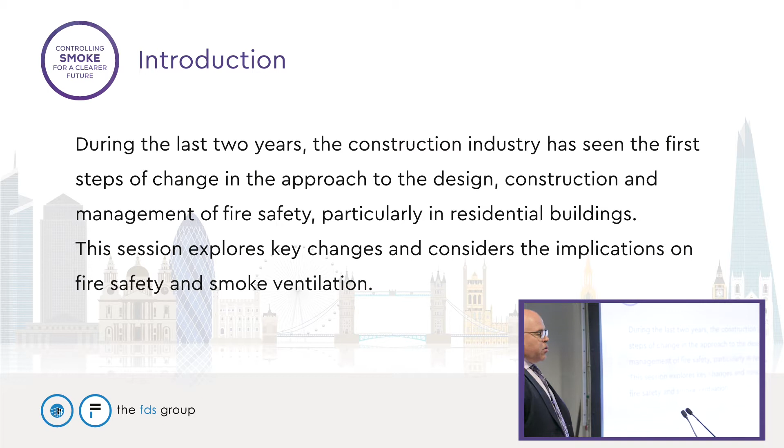The whole of the construction industry, as a result of it, has seen the first steps of change in a new approach to the design and the construction and the management of fire safety, particularly in residential buildings. What I wanted to do with this session is to explore the key changes and consider the implications on fire safety, but also some of the implications on smoke ventilation.

So what have the key changes and drivers been? I think everyone will have heard of the Hackitt report. That was an independent review of the building regulations and fire safety that was commissioned by the government following the Grenfell Tower fire. The report, carried out by Dame Judith Hackitt, was published in May last year.

In response to the fire and the Hackitt report, the government set up the Building a Safer Future programme, and there have been some recent new building regulations as a result of that, and I'm sure there'll be some future new building regulations, some of which have been consulted on as we're here today.

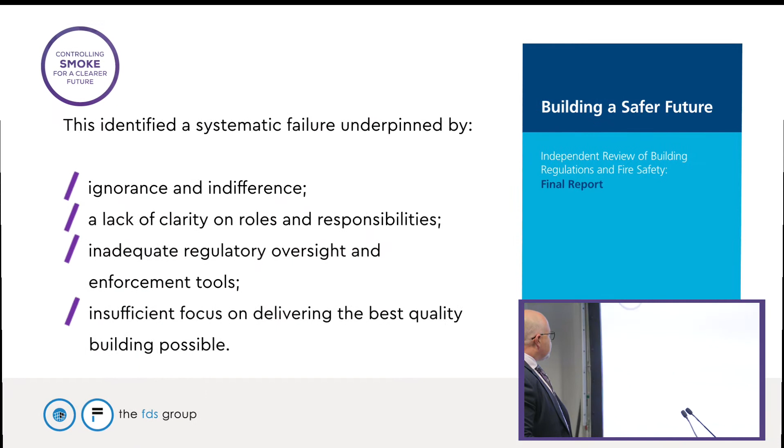So the Hackitt report, summed up in a few sentences in terms of Dame Judith's findings. Ignorance and indifference. So I think that's about the interpretation and the application of the building regulations and the guidance, the knowledge and competency of the guidance to the building regulations, and perhaps taking it as seriously as it should be.

She found that there was a lack of clarity on roles and responsibilities, and that was through from the client through to the developers and contractors, the designers, and the people managing the occupied buildings.

Inadequate regulatory oversight and enforcement tools. So that's really talking about the building control bodies and perhaps the fire service and their role in delivering safe buildings, and perhaps there not being enough teeth in the building regulations and the Building Act to be able to make sure that they are properly applied and delivered.

And then insufficient focus on delivering the best quality building possible, and that's a difficult one. There's a lot of focus, I think, on the speed of delivery and profit in the construction of new buildings. Inevitably so, the new buildings are built as a business. So those are the key findings that she identified.

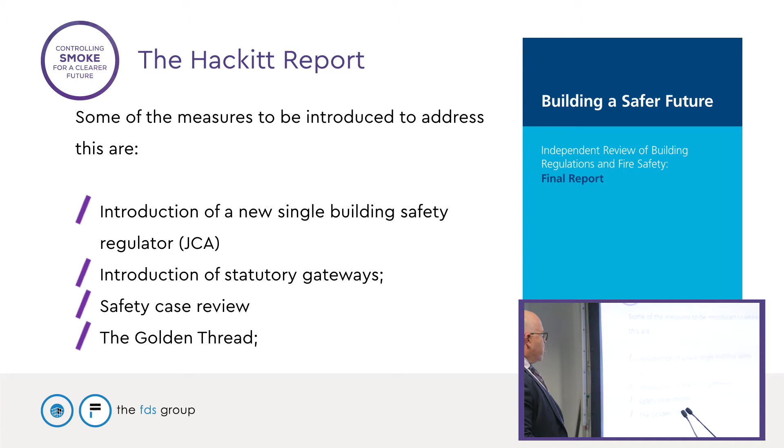So the MHCLG have been responsible for responding to the Hackitt review. The government's proposing a new building and fire safety system which puts residents' safety at its heart. New building regulations have been introduced prohibiting the use of nearly all combustible materials in the external walls of residential buildings taller than 18 metres. And there's a good chance that that's going to be extended to include other high-risk buildings in the future.

Approved Document B has recently been republished. The objective of that was to provide clearer advice on how to meet the fire safety requirements of the building regulations. And there's currently a consultation on reducing the threshold for the provision of sprinklers in flats.

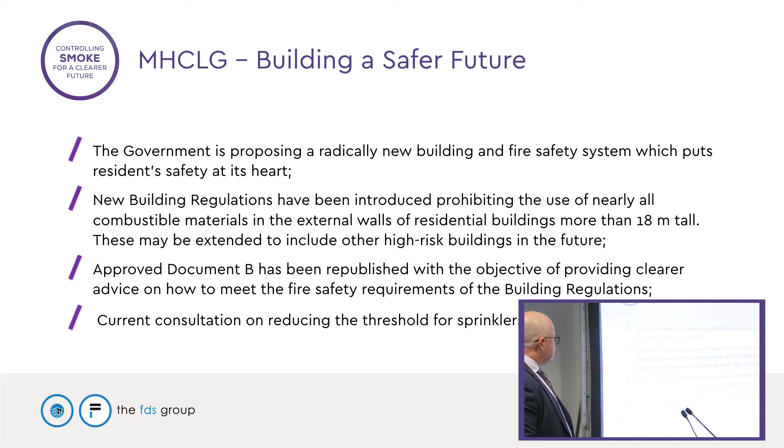There was a consultation earlier in the year. We're currently awaiting feedback. The MHCLG are in the process of analysing that feedback, but the proposals were in 5 areas. So the scope of the new regime: it would apply to new residential buildings and existing residential buildings when they're altered. It wants to set out that the duty holders have very clear responsibilities through a building's design, construction, and occupation. So that's responsibilities for the client, the developer, the designers, the contractor, and the people that manage the building during occupation.

They want to give residents a stronger voice in the system, making sure that they're not ignored. They want to create a transparent process for receiving complaints and dealing with them, so that the residents can see what's happening about the fire safety standards in their building. We've already mentioned the need for a new regulator of building safety, and the need for strengthened enforcement and sanctions, so that the regulations and the application of them have actually got teeth and mean something.

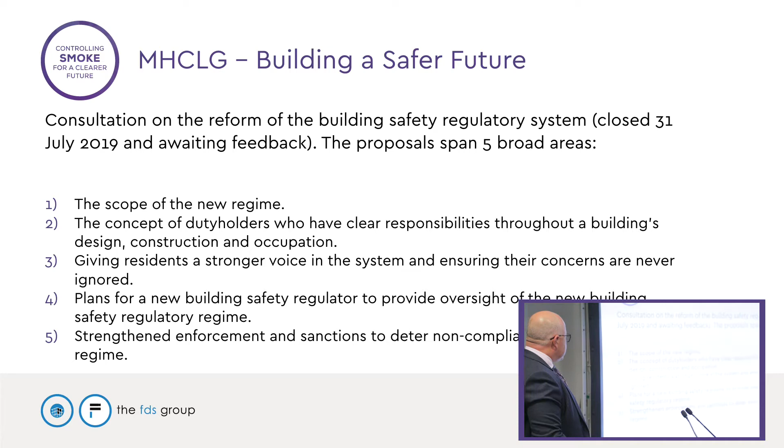So I mentioned earlier there's a consultation currently on reducing the threshold for sprinklers in flats. That closes on the 28th of November, and it's certainly something that I'll be responding to. The proposals cover 3 areas. The main area is to reduce the height at which sprinklers are installed in buildings that are used as flats. There are a couple of secondary areas that it's looking at in terms of improving wayfinding and evacuation alert systems. So the sprinkler threshold, the plan is to reduce it to 18 metres in flats.

This proposal is a result of the MHCLG's call for evidence last year, when a large majority of the comments were in favour of reducing that threshold. In fact, I've heard recent comments saying that some people would like to see it reduced even further to 11 metres, which I think would be in line with Wales and Scotland. Clearly, the installation of sprinkler systems in so many more buildings is going to have an effect on the sprinkler industry, and there's a 6-month transition proposed to give the industry a chance to get up to speed with that.

It's only going to apply to new buildings. So the vast majority of the housing stock, blocks of flats that are over 18 metres, are existing, and it's not intended that it will apply to those. That's going to be dealt with, I think, by the safety case review that's going to come in place, and that will look at whether sprinklers need to be retrospectively installed in those buildings.

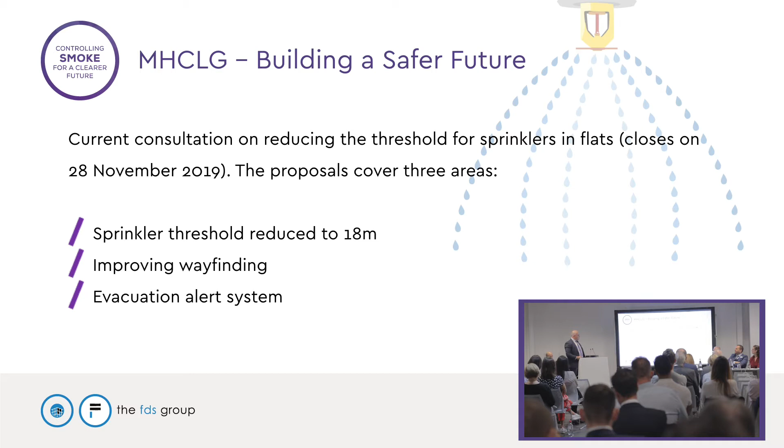The third proposal that they've made, and I believe this has already been adopted in Scotland, is to incorporate an evacuation alert system. Now, this is to give the fire brigade a chance to evacuate the whole building in the event that a fire situation demands that it's necessary. There's a few concerns about this.

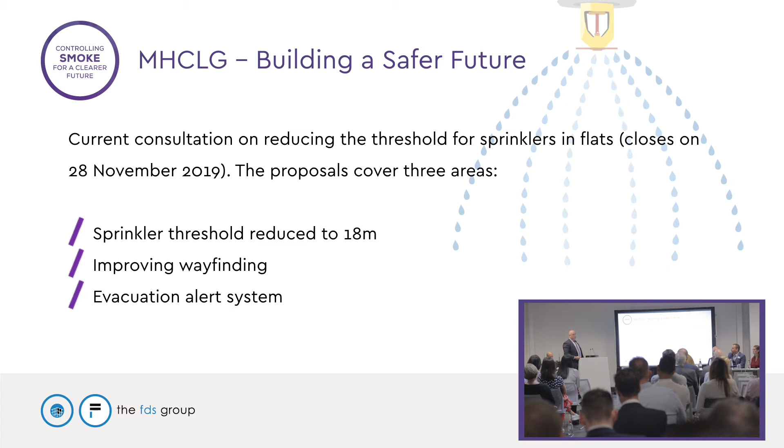Firstly, the evacuation strategy currently for blocks of flats is defend in place, and for that reason the stairs aren't designed to be wide enough for everyone to evacuate simultaneously, so there may be some queuing on the stairs if that happens. Secondly, smoke ventilation systems are generally designed for one door to be opened at a time, and we could find ourselves in a situation where multiple doors are opened, reducing the effectiveness of the ventilation system. So these are all things that would have to be looked at if this is to be introduced.

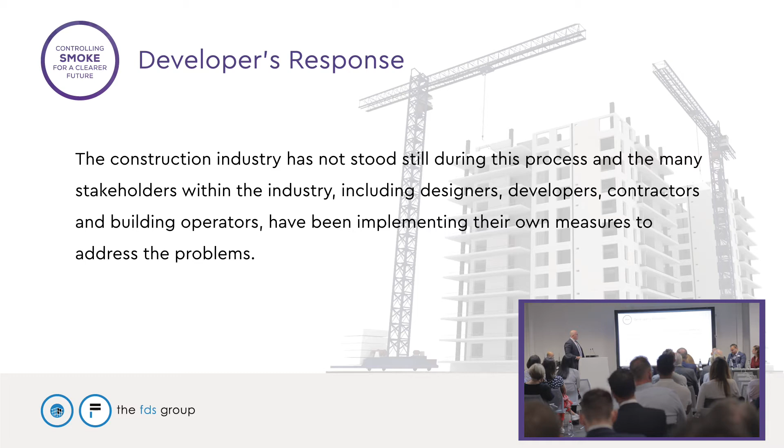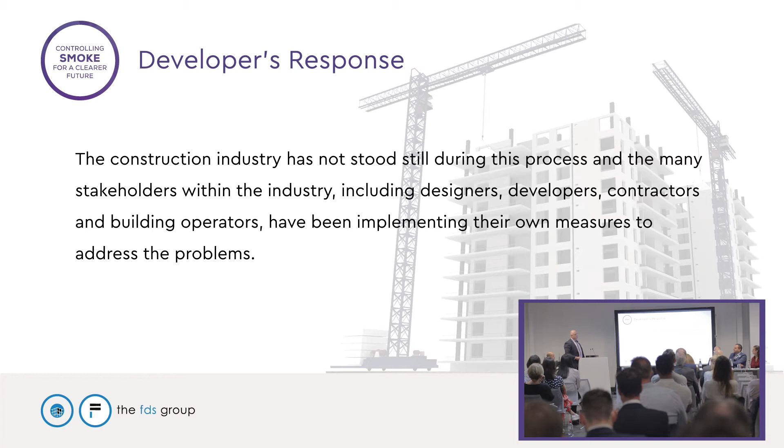So the construction industry hasn't stood still during the process of change, and I've certainly witnessed many stakeholders within the industry, including designers, developers, contractors and building operators, implementing their own new measures to address the problems. Some examples of those. So very early on after the Grenfell Tower fire, many developers were already looking at how they could incorporate safer external wall constructions in their new buildings. That was mostly focused around the combustibility of insulation.

Many developers have taken the decision to install sprinklers at a lower height already, typically 18 metres. So there's many developers already actually meeting the proposed consultation. I think one of the benefits of installing sprinklers at a lower height, or taking the early decision to do so, is it has increased design flexibility. So we've been able to do other things with buildings as a result of having the sprinklers in there at a lower height. But whether we'll have that flexibility in the future, if the approved document is changed to make them come in at a lower height, who knows?

Interestingly, whereas Regulation 7 for combustible materials is mandatory, which we'll come on to in a moment, they're planning to introduce the reduction in sprinkler height in Approved Document B. Now, of course, that's guidance, so it may still be possible to develop a case to comply with the building regulations without putting them in, in certain circumstances.

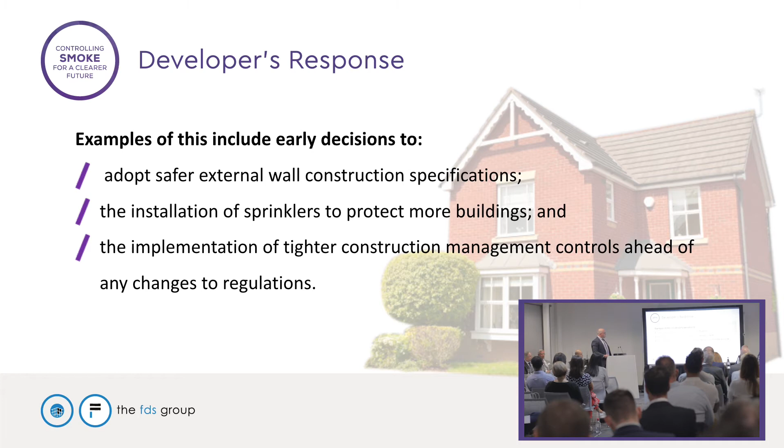We've seen a change in the approval process as well, and that's had quite a big impact. So London Fire Brigade have been requiring all fire engineering proposals to be fully checked by the building control body before consultation. After all, the building control body administer compliance with the building regulations, so it's reasonable for them to do so, particularly with the resources that they have.

As a result of this, building control bodies, because they don't have the level of expertise often to be able to review that sort of information, are employing third-party fire engineers to do so. This is resulting in lots of differences of opinions, and that's affecting the approval process. Building control bodies and London Fire Brigade are taking a far more stringent approach in their application of the guidance.

So, for example, where previously it's been possible to build a basement car park without sprinklers because of the guidance in Approved Document B that says that it's not necessary to install sprinklers in car parks that are mechanically ventilated because they're perceived to be a low risk. Because of some notable fire incidents recently, they're now applying the interpretation of the guidance far more literally. So they're now requesting sprinklers to be installed within basement car parks.

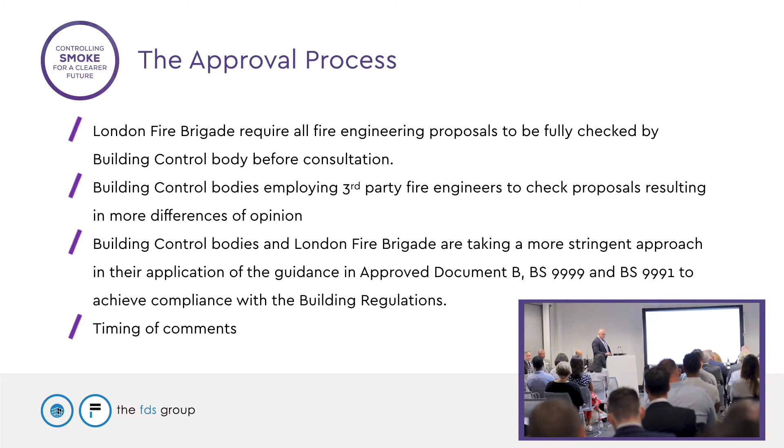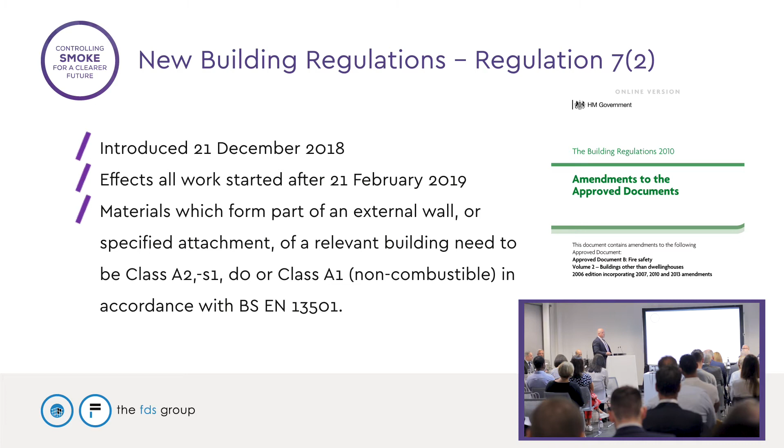So I mentioned earlier that there's some new building regulations that have been introduced. The key regulation that's changed is Regulation 7. This was introduced at the end of last year, and there was a 2-month delay before it came into effect. So it affected all buildings started after the 21st of February 2019. The essence of the regulation is that it prohibits the use of combustible materials within the external walls of relevant buildings. It also refers to things like specified attachments, which I'll come on to now.

So relevant buildings include all buildings that are more than 18 metres tall and contain at least one dwelling, so a flat or a dwelling house potentially where you've got some kind of maisonette type arrangement, contains an institution, so that's potentially a hospital or some kind of care facility, or contains a room for other residential purposes. So it can mean student accommodation as well, but it doesn't mean a hostel or a hotel or a boarding house. Specified attachments are controlled in the same way, and the definition of that includes balconies, brise-soleil, and solar panels attached to the wall.

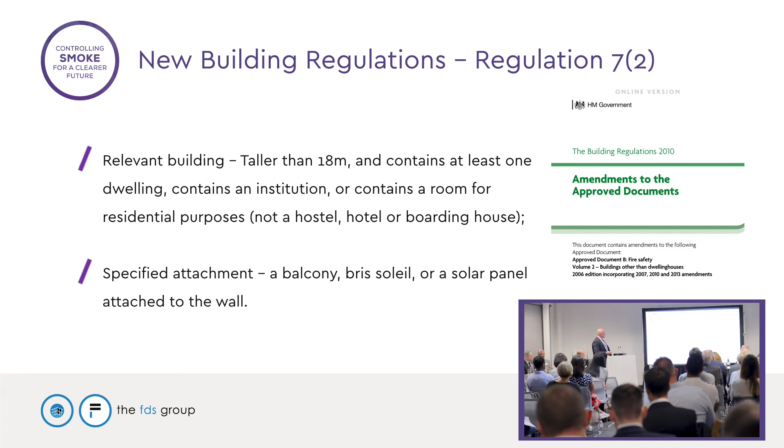There are some exemptions. There's a list of exemptions to the requirements. Cavity trays between two leaves of masonry. It's very unusual to build a building more than 18 metres tall having two leaves of masonry. It's usually some form of lightweight construction using SFS and plasterboard. So it's not much of an exemption really. Door frames and doors, they're exempt. Electrical installations, you can read the list. It's all fairly clear while they're relatively small components or low risk because of the location that they're installed within the building.

Interestingly, thermal breaks for compliance with Part L, they are exempt, but they need to be kept as small as possible, and they're not allowed to breach compartment walls. Window frames and glass is a good one, which we'll come on to in a moment.

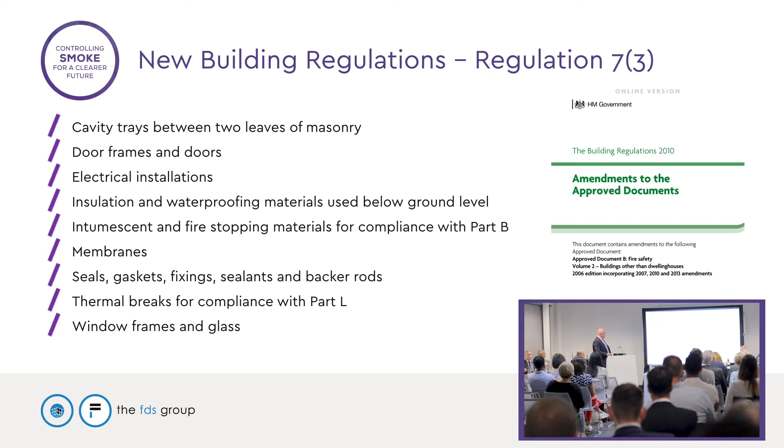So here are some of the challenges. So traditionally, we're used to the technical guidance for compliance with the building regulations to be functional, i.e. you've got to achieve a reasonable standard of safety. However, Regulation 7 is, as it says, a regulation, and it's mandatory. So there's no flexibility at all, other than in the interpretation of the regulation, to do something else, unless you go for some form of dispensation or relaxation.

We've seen the limited definitions that help with interpretation, but they're not really definitive. And we're still finding there are times where we're having to ask the building control body what their view is on what a particular item is. Laminated glass in a window is exempt, but not if it's in a balcony.

In my opinion, it's probably still quite a low risk in a balcony, but because the regulation is mandatory, you have no flexibility at all to provide a technical case for doing something different.

We've mentioned balconies, but I was at an event last week where the building control body that was presenting on the evening raised the opinion that where you've got terraces on a building, they would treat them as balconies, where those terraces were accessible by residents. That's an interesting extension of the interpretation of a balcony, I think. But if you've got a building control body that's very fixed in that view, there's effectively nothing that you can do about it.

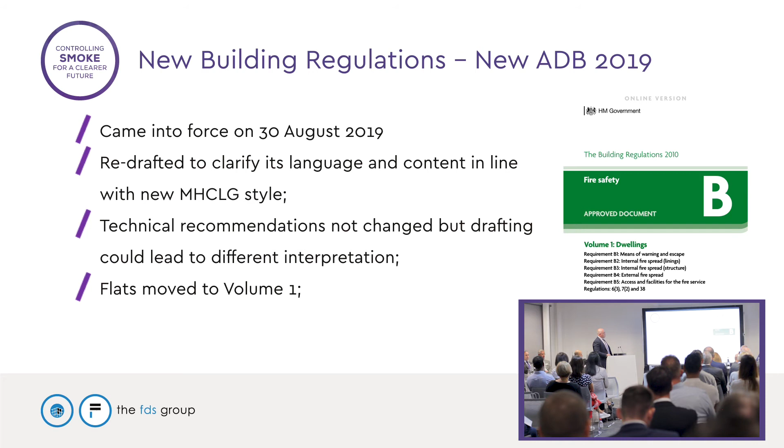So in spite of this new guidance, it seems it may have been rushed out without thinking about everything, because it was published, I think actually at the beginning of July, and came into effect the 30th of August, and then earlier this month it was temporarily withdrawn while they addressed some comments on the performance of fire dampers. I understand that it's been reintroduced as late as yesterday. Too late for me to update the presentation, but I think that's almost unheard of. It's unprecedented in the 30 years that I've been in the construction industry.

So I thought I'd end by summarising some of the problems and challenges that I think we've got coming up for us in building. The introduction of the statutory gateways is going to increase the duration of the development programme. What's going to be interesting is to see whether the single regulator is going to exercise some degree of flexibility in allowing certain parts of the building design to be signed off and then allowing construction to start, or whether they'll insist on all aspects of the fire safety building design being completed, and time for them to review and approve it before you can start work on site. Currently it's normal practice to do enabling works and foundation works and start coming out of the ground while you're still finalising the fire safety design.

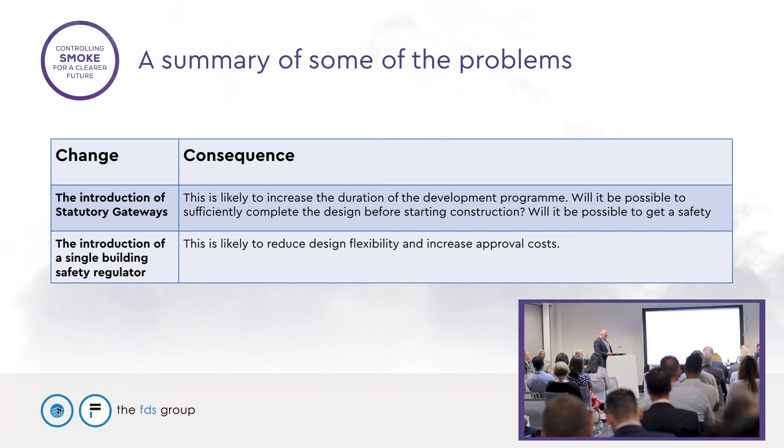We've just talked about the consultation on reducing the sprinkler height. One of the things that I can see is that with shorter buildings being sprinklered, we're not going to be able to use them in all circumstances to help create some additional design flexibility. And Regulation 7, it's mandatory, still subject to interpretation, has resulted in more limited design flexibility.

As I mentioned, in the case of cavity trays, a compliant product isn't available. Glazing is acceptable in windows and doors, but of course in balconies you have to use laminated glass for safety purposes. Laminated glass has a sheet of plastic to control it breaking, so that doesn't comply with Regulation 7. So that's a big issue, because glazed balconies are used commonly in construction.

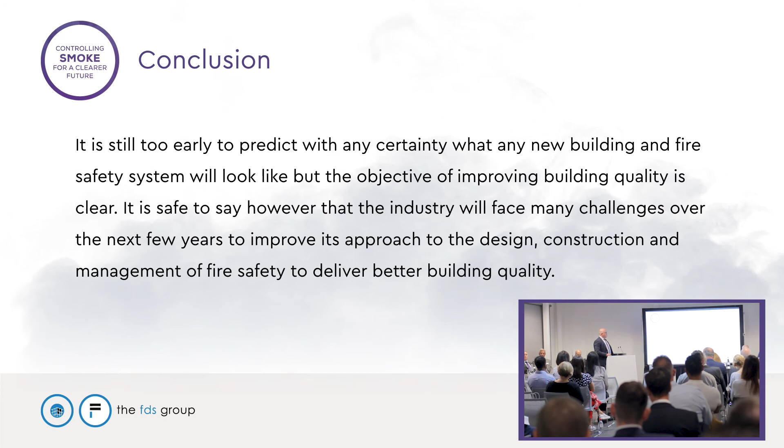So just to conclude, I think it's still very early to predict with any certainty what the new building and fire safety system is going to look like. The objective of improving quality is clear, and we've got many challenges to face over the next few years to improve our approach to design, construction and management of fire safety if we're going to deliver better building quality.

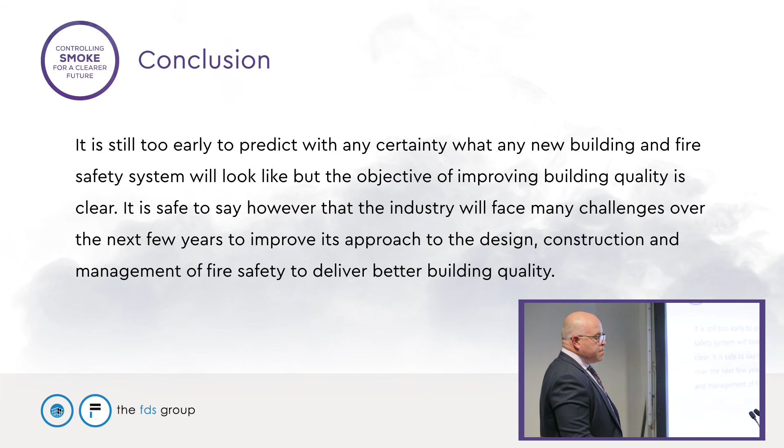As I understand it, there's no timescale yet for the introduction of either the single body regulator or the gateway process. I did read that there are some early adopters who are trialling part of it, so there's organisations in the industry who are working together to try and trial some of these new proposals to see how they're working.

The plan is that you'll join the gateway process at the relevant point. So if you're already in construction, the first gateway that you'll have to go through is gateway 3. If you're already in planning, the first gateway will be gateway 2. And I think my advice would be, given that there's so little information around about how and when it will be introduced, the best plan is to start preparing as much as you can now by recording and producing as much information as possible on the building, so that when it comes to preparing the safety case, you're not having to go back retrospectively and look at it.

When it comes in, I understand it will affect anything that's under construction or in the planning process. It's just that you join the process at the relevant gateway. Yeah, and I think if you look at the way that recent changes have been introduced, so the new Regulation 7, there was a very short transitional period of effectively 2 months, whereas even if you had a building regulations application in, if you hadn't started by the 21st of February, then effectively you had to update your external wall designs to comply with the latest regulations. So I think we can expect less transitional grace in future.